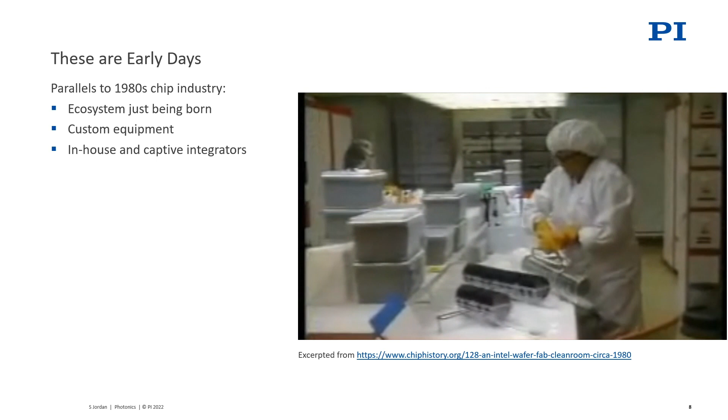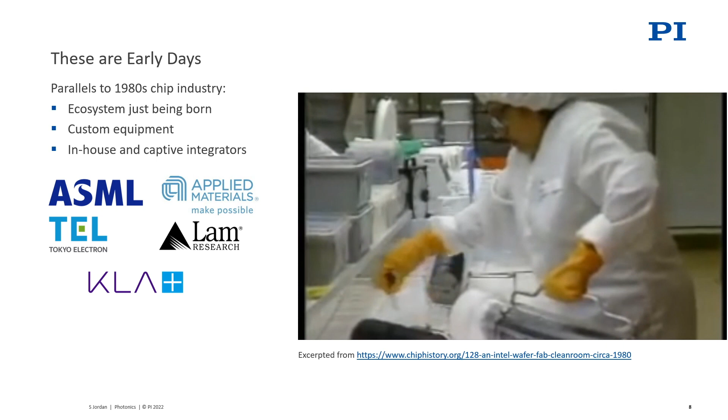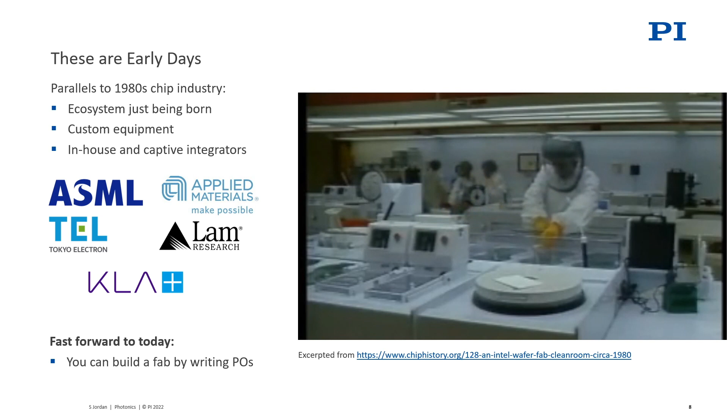The first thing to understand is that the photonics industry is undergoing a transformation, the same transformation we saw 35, 40 years ago in the semiconductor industry. This wonderful video is from the Chip History Museum, and you can see this is an Intel fab back in the mid-1980s. Chances are your first IBM PC, or maybe your father's first IBM PC, had its CPU manufactured in this facility.

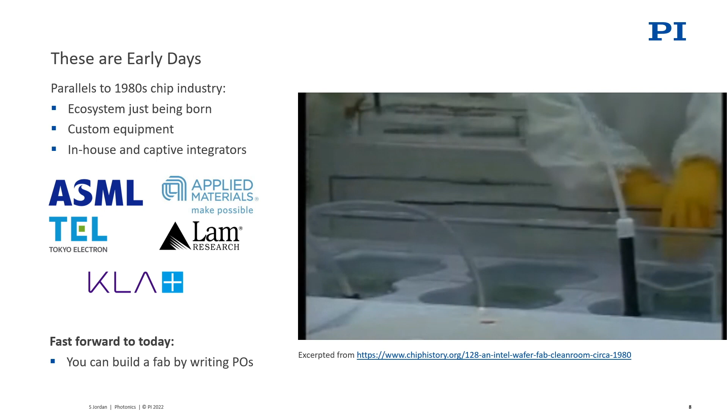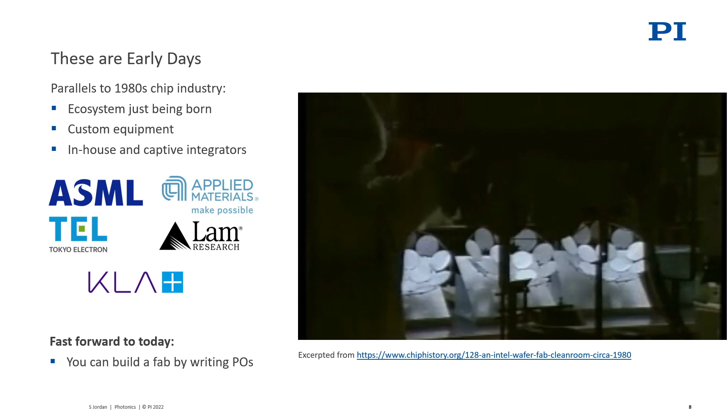And you can see lots of manual operations, lots of custom equipment. Now, doesn't that sound familiar? That's exactly what we're confronting in the photonics market today. These manual processes were eventually eliminated, replaced by automation, by an ecosystem of tool manufacturers. Today, you can build a semiconductor fab just by writing purchase orders, but that wasn't the case back in the 1980s when this ecosystem of tool makers was just getting started.

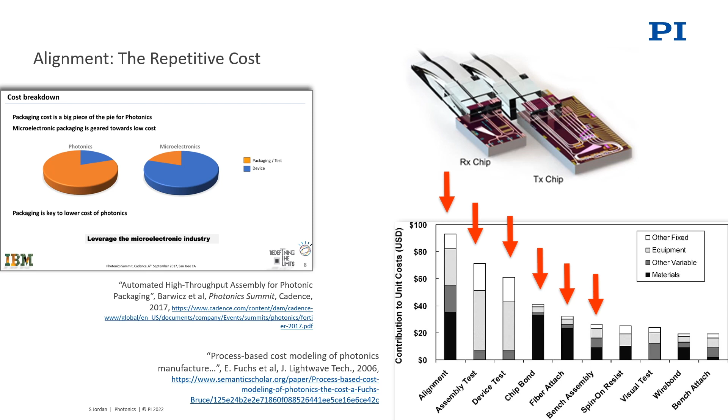First, it starts at the wafer. The wafer must be probed. The chips on the wafer must be validated, characterized, and increasingly binned, ranked in order of performance so they can be sold at different price points. It's a tradition in the semiconductor industry, and it has been coming to silicon photonics. But this repetitive, painful cost of alignment, since it needs to be repeated so many times, and since traditionally it has taken so much time to accomplish, adds up to about 80% of the cost of a silicon photonic device. This is what we have attempted to address in the past several years.

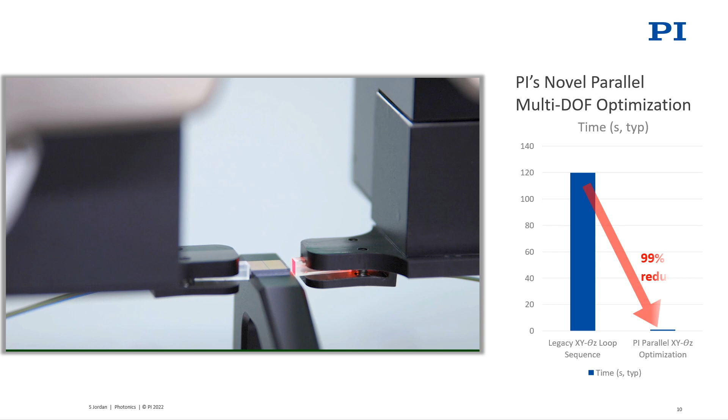Let's take a look at that. What we have achieved is a robust, flexible alignment capability that can perform more than one alignment at a time. In other words, it can do a lock-on on a transverse alignment of a channel in an array device and simultaneously perform the angular alignments and the gap setting alignment.

And have all this happening in one step instead of a lengthy sequential series of looping processes. So it's much faster, about 100 times faster. So an alignment that traditionally would take maybe 2 minutes to do for an array device now takes about 1 second.

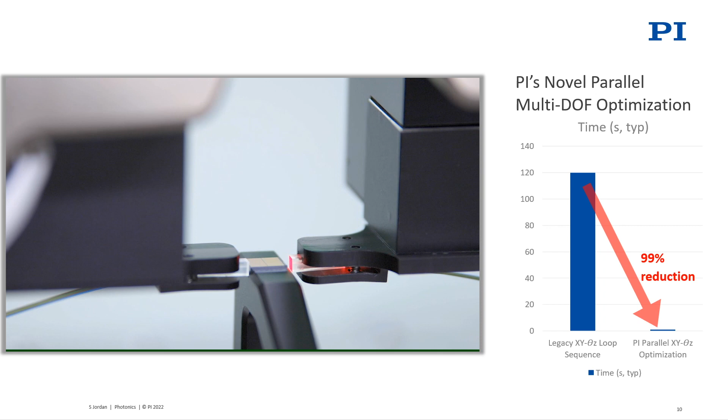That's been our contribution to the field. It reduces the pressure to find ways of doing passive alignment, for example, where parts must be machined to sub-micron tolerances in order for them to snap together like little optical Legos. That is not a cheap thing either. By reducing the cost and pain of active alignment, we have reduced the pressure on the industry to find other ways of doing things.

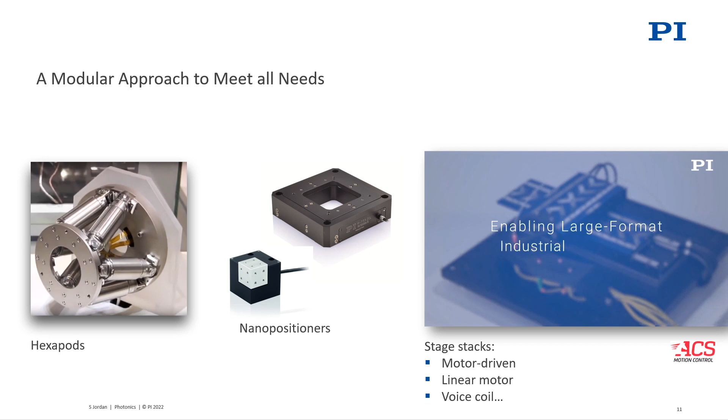Capability of performing multiple alignments simultaneously is built in across our product line now. So you have our hexapod micro robots, which have 6 degrees of freedom and an ability to rotate about any point in space, which is very useful for all kinds of optical alignments and assemblies.

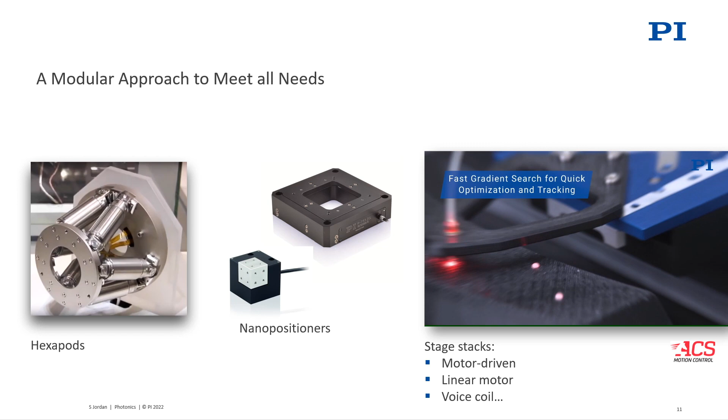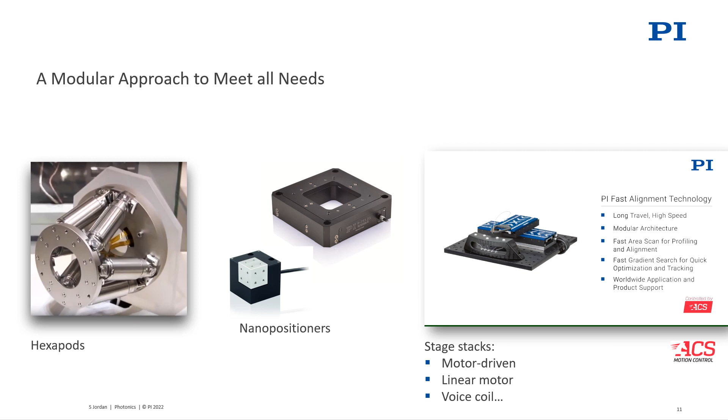You have our nano positioners, which are fast and offer resolutions down in the sub-nanometer region. You have stacks of stages driven by ACS controls, very flexible, long travel, truly industrial applications with mechanical bearings or air bearings. All of these share this functionality and can work together to get the job done quickly, 100 times faster than any other approach.

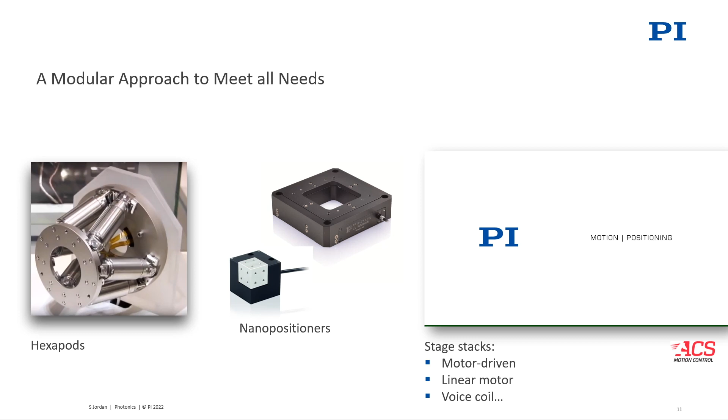By the way, we recently introduced a new capability that is getting some interest as well. This is an ability to ride the beam down when you're inserting one part into another. So think about this: if you have an inset assembly where some element must be inserted into another one, and you want to do so without touching the sides, perhaps this is a way of doing that.

We can maintain a transverse lock as you perform a Z insertion and maintain the proper angles as well using this parallel alignment technology. So this is a very powerful way to assemble some of these new photonic devices that we're talking about.

So let's talk about that second item, innovation. One of my favorite topics. I'd like to throw a spotlight on some innovative players in the industry. Let's take a look at that.

Company that I would like to spotlight is a brilliant young company called Teramount. Teramount has developed a unique approach to passive alignment. It utilizes a glass interposer, and the optical configuration greatly reduces the sensitivity of transverse alignment. So this is a very nice approach, a very clever way of performing certain packaging operations for certain photonic devices.

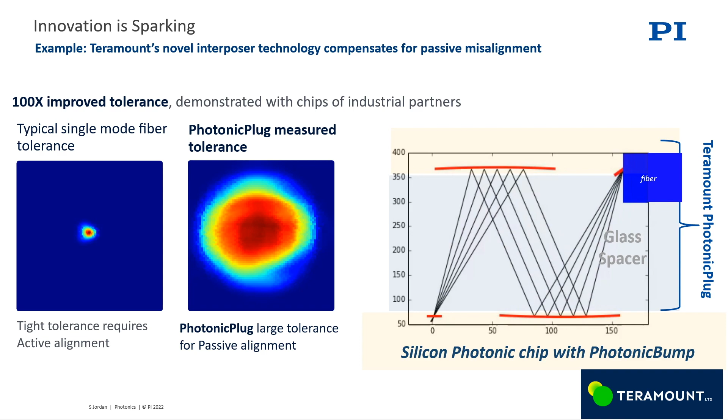Here's another example of innovation at work. This is a platform that has been developed by Philips. It's being implemented at MedPhab, which is a consortium in the Netherlands. I'll have more to say about MedPhab in a few minutes. But here it is: it's a platform that can be built into a catheter to provide extremely high data rates.

So you can build sensors and things that we can't even imagine today and actually insert these into patients to perform monitoring or to drive instrumentation of various sorts. The possibilities are literally limitless for something of this sort, and it's all enabled by silicon photonics.

And again, these devices need to be manufactured, they need to be tested, they need to be assembled, and so again, you see the challenge.

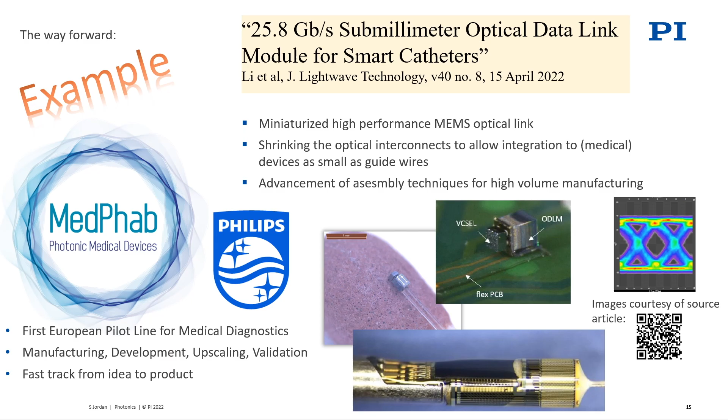So what about that third element? We talked about automation, we talked about innovation. Let's talk about cooperation.

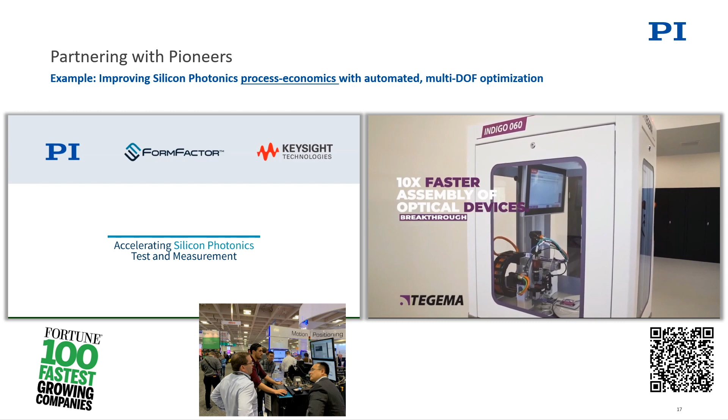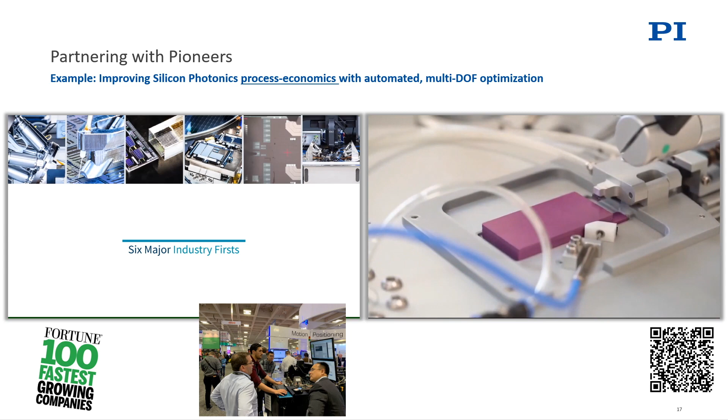First, our approach has been to find those pioneers in each market and work with them to resolve the issues and make a successful entry into the marketplace. So one good example is FormFactor. FormFactor started working with us over 6 years ago to build the world's first fast silicon photonic prober, and they've achieved really great things and helped drive them to Fortune 100's list of fastest growing companies. And they've taken full advantage of the parallel capabilities of PI's alignment technology.

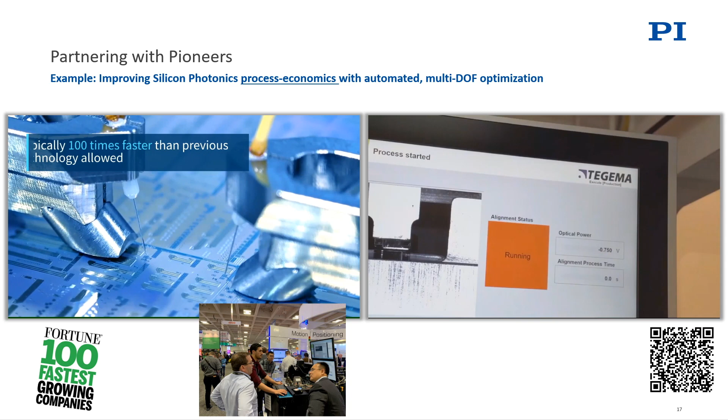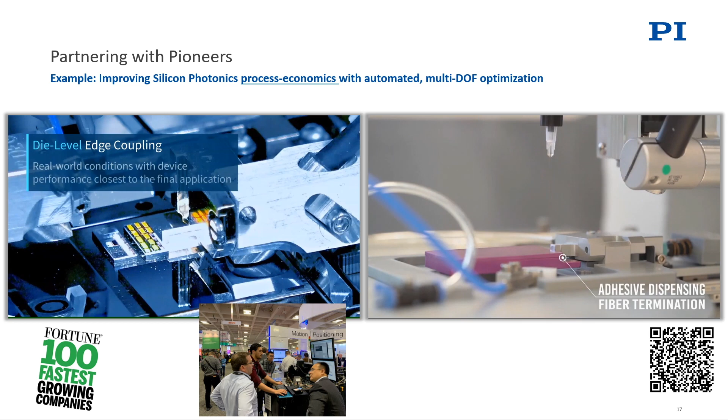On the assembly side, there's Ediplan. Ediplan recently purchased Tegema, which made a tool that is 10 times faster than anything else on the marketplace because they also take full advantage of the parallel alignment capability of PI's alignment micro robots. So these two companies sort of bookend the process for manufacturing silicon photonic devices, starting at the wafer level, ending up with final assembly.

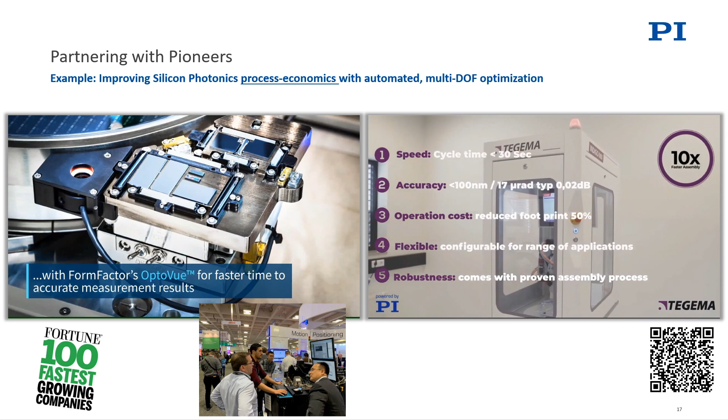Just a couple of examples, there are plenty more. Across the field of tool makers, contract manufacturers, and systems integrators, there are qualified companies eager to work with you to solve your problems, and to help us together meet the challenge of brand new applications and exponentiating demand.

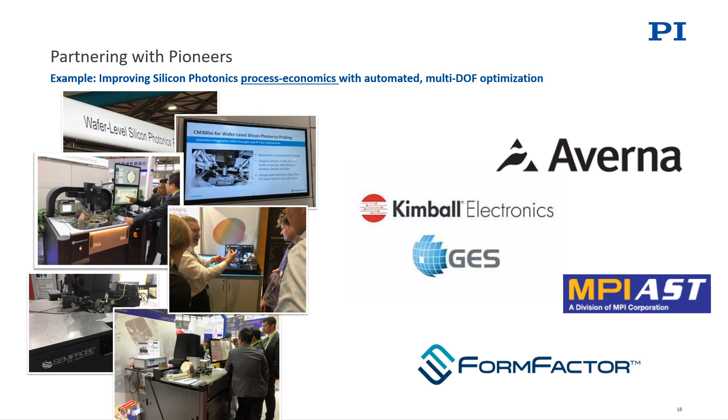And there's another thing. One thing we have done is open up a space for working with customers in Silicon Valley. Take a look.

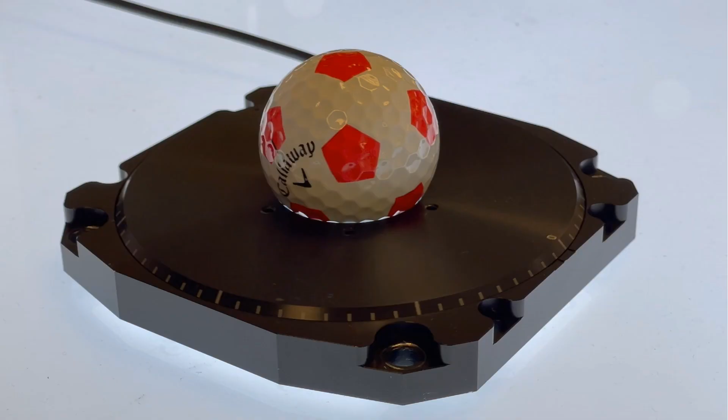Welcome to PI's Silicon Valley Technology Center. Here we address what's possible in the world of photonics today. We have a showroom with many examples of the equipment that we make. And this is the place where we have a team that can work directly with customers to solve advanced problems involving ultra-precision motion and photonic alignment.

I briefly mentioned contract manufacturers. These have been and will remain a very important resource for meeting this grand challenge confronting the photonics industry today. There are several I would like to spotlight here. Benchmark Electronics, for example, set up a magnificent facility in the Phoenix, Arizona area for building photonic devices and tackling especially tough packaging challenges. Integra Technologies is another group here in Silicon Valley known for their quick, responsive approach to packaging devices. OEIC is a very broad company in Vietnam specifically focused on manufacturing active optical cables, which, as you saw from one of my first slides, is a field expected to have very high demand. Each of these are companies with expertise, willingness to work with customers, and capacity.

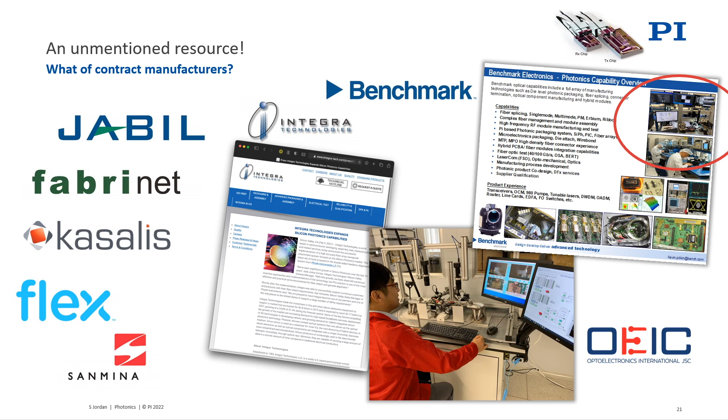In Europe, in particular, there are some resources. There's actually global resources, but these are built on the foundation of the European Union's approach to building a photonics manufacturing infrastructure. This goes back to 2013, almost a decade ago, when it established a series of pilot lines and consortia addressing specific challenges in the marketplace.

Of these global European resources is the Podium Consortium. This is a group of several companies, including PI, each bringing specific expertise to the question of packaging and assembly of photonic devices. This provides a critical mass of expertise and access to equipment and to people who know how to solve the problems of photonics packaging. So this is great for companies devising new types of photonic devices and assemblies who are wondering what the best practices would be for assembling these devices.

Companies involved in Podium include PI, obviously, and also CITC, which specializes in packaging technologies; PHIX, which is a packaging foundry for photonic ICs—isn't that an interesting concept? And then Etteplan, which makes scalable automation assembly toolings, and FineTech, which makes exceptional submicron die bonding equipment. All of these are part of the solution, and we work together to develop solutions and approaches that are scalable and economically feasible for clients. So if you are facing a challenge, this is a group you can call up and work with on a confidential basis to develop an optimized assembly production process.

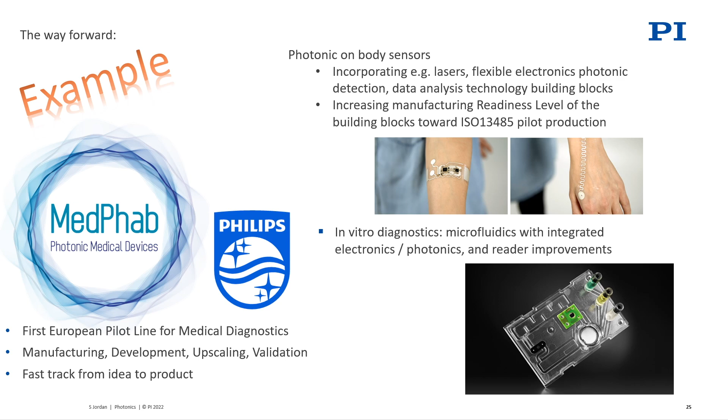So let's wrap it up. We have a challenge: this industry must scale its productivity by 3 orders of magnitude in the next few years. It's coming, it's happening as we speak. And the overarching theme, I think, is that we as an industry need to pursue those 3 themes of automation, innovation, and cooperation. And we're here to help.

We went through this with the semiconductor industry 50 years ago. We enabled that industry and have been doing so since its infancy. Genomics automation is another example where PI is deeply embedded—we enabled that industry from its infancy as well. In silicon photonics, we've been doing this for quite a few years now, and we hope one day to look back and say, we helped. Let us help you.